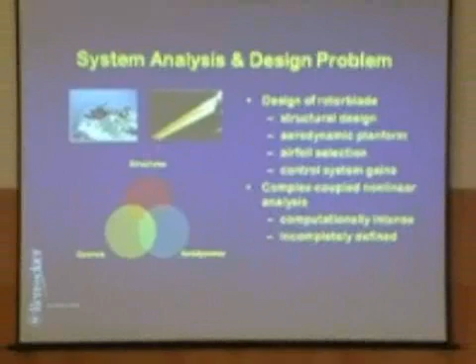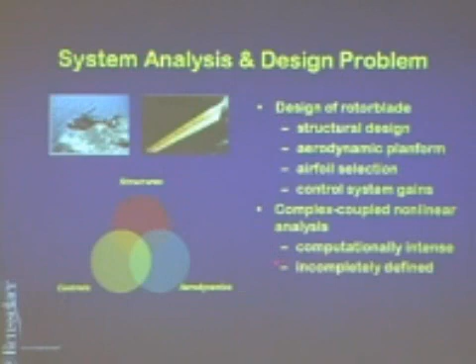We'll start with an example. Here's a helicopter rotor blade. The design of this blade requires interactions between disciplines like structural design, aerodynamics, control systems. You see that I've represented in this cartoon sketch each of these disciplines by these 3 circles, but there is a great deal of overlap or interaction or coupling that exists between these subsystems. The analysis that is involved is computationally intense and in many instances is incompletely defined. You must resort to experiments to get a certain amount of information back that could be used in the design process.

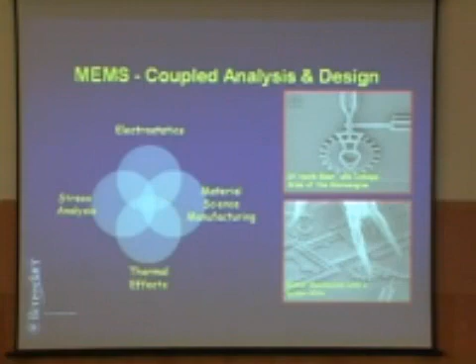Similarly, here's an example of MEMS systems. Here's a 19-tooth gear and linkage arm of a micro engine. Here's a mirror mechanism laid out against a spider mite to show the dimension of this. But in effect, because of these dimensions, disciplines like electrostatics must be considered in addition to material science, manufacturing, stress analysis, and thermal effects in the design of systems like this. Once again, it's a coupled analysis. It is computationally intense. And in many instances, you have to resort to experiments to try and get analytical data in order to perform the design itself.

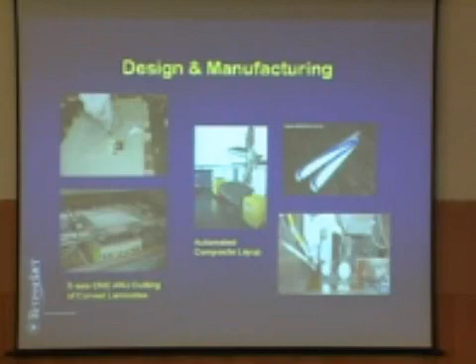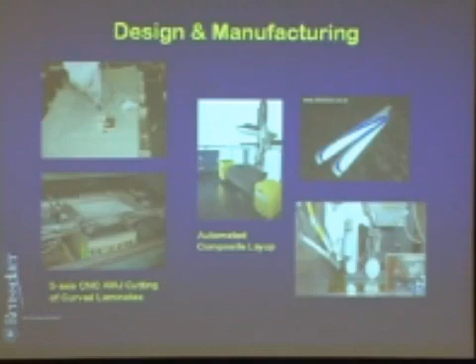A third example, you have to include effects of manufacturing in the design process. So here you see an automated composite layup machine in which you have a robot arm which lays out composite fibers over a mold at specific angles. Here's this curved panel in which you are cutting out certain objects, again by an electronically controlled machine. The issue here is that we would like to migrate the manufacturing process as early in the design process as possible. And in order to do that, you must have models which represent the manufacturing process itself.

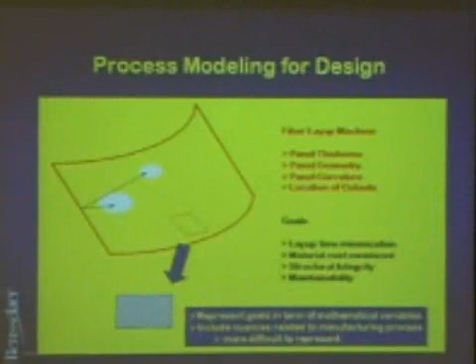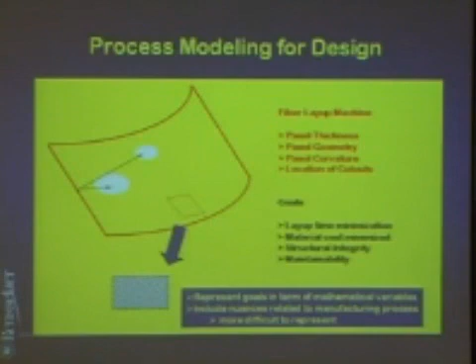Here's a more detailed representation of that. Here's that curved panel. I have put some cutouts here. These cutouts might have to be placed because this panel is covering a cavity which you might have to access for maintenance purposes. So here's your fiber layup machine. It has to control the panel thickness, the geometry of the panel, the curvature, as well as the location of the cutouts. And the goals of designing this might be, you might want to minimize the layup time that is required to build this panel.

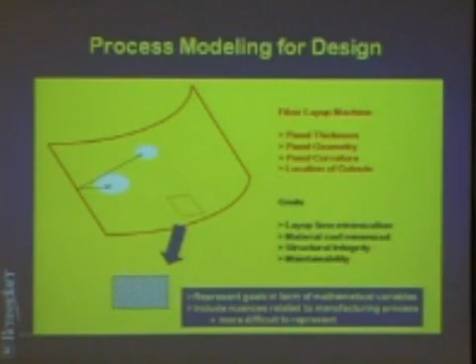You want to certainly minimize the material cost. Of course, you want to guarantee structural integrity of this part, and then place these cutouts in such a place that you can actually maintain this object that you are trying to cover with this panel. So the goal of this is you must be able to represent all of your design goals in terms of certain mathematical variables.

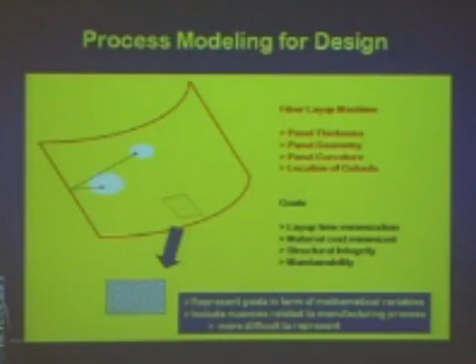As well as be able to include nuances that are related to the manufacturing process. Not all manufacturing processes can be modeled exactly. You sometimes have to go to the shop floor to get feedback from the operators on when a machine functions well, when it fails, and be able to model that into an appropriate mathematical format that can be then used by your standard design algorithms, which might be your classical mathematical programming algorithms or soft computing algorithms that were discussed earlier this afternoon.

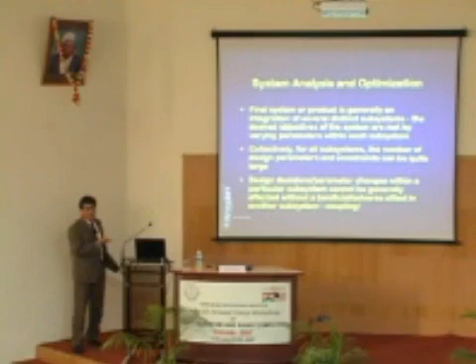So, in summary then, the system analysis and optimization problem that we'll talk about here has these characteristics. The final product or system is generally an integration of several distinct subsystems. There are design parameters and constraints in each one of these subdisciplines, and the overall desired objectives are essentially met by varying the parameters within each subsystem. Collectively, for all of the subsystems, the number of design variables and constraints may be quite large.

And also, you cannot, in most cases, conduct design in isolation because changes in design parameters that take place in one discipline have an adverse or beneficial effect in another subsystem. So you have to take those couplings into account as you go through the design process.

At the heart of all of this is the design optimization problem, which is mathematically stated as follows. All of you who have dealt with optimization have seen the structure. You're minimizing a function which could be a vector quantity or a scalar quantity subject to a set of inequality or equality constraints as well as side constraints on the design variables. These design variables can be a mix of either continuous variables, discrete variables, or integer variables, and you may have a large number of such variables.

Now, pay close attention to the fact that there are discrete and integer variables because soft computing techniques really come to our aid in this particular instance. The design space may be non-convex or disjointed, and I'll just show you a sketch of what I mean by that, and your traditional optimization methods are ill-equipped to handle this kind of a characteristic in the design space. You also have to deal with non-crisp design information, and the speaker this afternoon, Dr. Kumar, talked about fuzzy modeling as a way to get around this, and I'll also have an example to show you where this has been used.

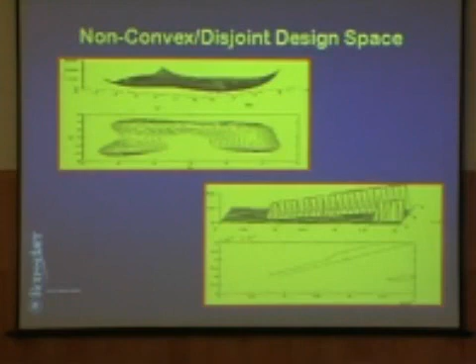This quickly is an illustration of a non-convex space, a classical function with 4 local optima. In this case, each one of these 4 local optima have the same objective function value. Your traditional gradient-based techniques will converge to the nearest local optimum from where you start. Here is an example of a disjointed design space where you have regions of feasibility separated by large regions of infeasibility. So when you get into one of these feasible spaces, it's unlikely that you're going to get out of them using your traditional gradient-based mathematical programming algorithms.

So what are the soft computing adaptations that I will talk about here today? Neural networks and fuzzy logic. Dr. Kumar talked about surrogate modeling of the analysis. That's certainly one application that we have used extensively. Discovering causality in data becomes important as well, because if you have a large optimization problem involving a very large number of variables, you want to perhaps break it down into a sequence of smaller, albeit coupled problems. You would like to find out which variables affect which design constraints so as to make a rational choice for that decomposition. Again, artificial neural networks have been used in that process as well.

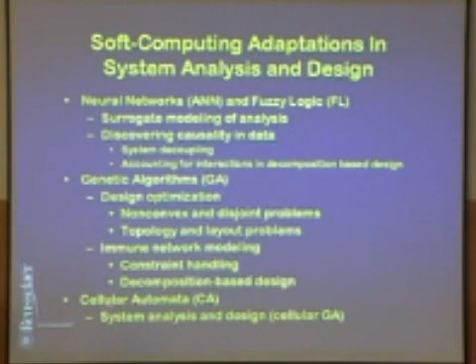Genetic algorithms certainly have been very useful in designing non-convex and disjoint problems, as well as topology and layout type of problems. And when you talk about nano assembly, for example, which are topological problems, genetic algorithms have a significant role in that regard as well. I'll talk a little bit about immune network modeling. This is a variant of genetic search, which I'll show how it has been used in problems of constraint handling, as well as in accounting for the interactions in decomposition-based design. And finally, I'll say a few words about cellular automata and the implications of this particular computational paradigm in both system analysis and design problems.

You have a set of input-output data, and in effect, rather than training the coefficients of those polynomials in a response surface, you are in essence finding out what are the interconnection weights and the characteristics of your neural network, or of your artificial neuron, that give you the best match between the input and output. These are the characteristics. Certainly these can learn to modify behavior in response to the environment, as well as they have the capability of generalizing.

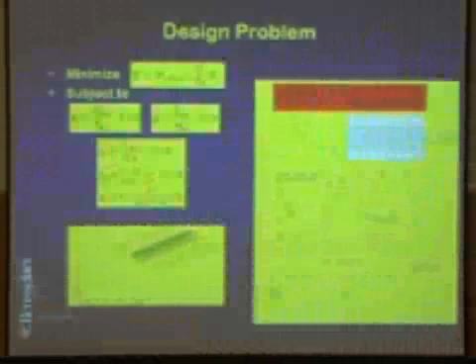Okay, so I'm not going to dwell on that slide, just show you some examples. Here's a design problem in which we have a reinforced composite panel with some stringers.

In case you're wondering why I keep talking about structures and materials, I'm an aerospace engineer by training, and this is what I feel most comfortable about, and hence I'm using these examples.

But we are trying to design this panel, essentially getting things like the height of this reinforcing stringer, the crown width, the width at the base. This is built out of composite materials, so you have the thickness to control as well as the layup angles of these composite plies that you're building.

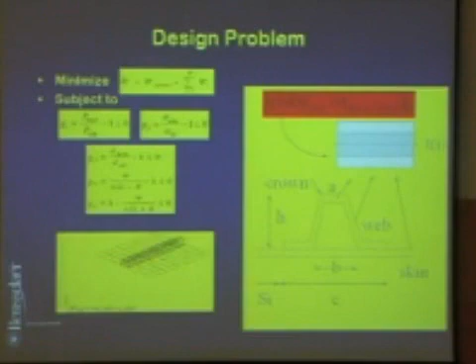Here's your objective function. It is subject to a number of constraints, and in essence I just wanted to show you that while you have a mix of discrete, continuous and integer variables, you can still use this type of problem in a backpropagation neural network to actually come up with things like predicting natural frequency, buckling load, the maximum deflection, maximum von Mises stress. And you can see that the maximum error that you pick up is maybe of the order of 6%. Most of them are 1 to 2%.

So if you build an approximation using a neural network, it can be very effectively adapted and used in multidisciplinary design types of problems. It's essentially a free computation once you have a network trained.

The computation is free, and when you're using it in conjunction, for example, with an evolutionary algorithm which requires a lot of calculations, this surrogate model is a cheap one and highly advantageous to use in those kinds of applications.

Let's say a few words about discovering causality from trained backpropagation networks. If you were to simply take the weights of the trained network and multiply them in this sequence, that is the weights between the input layer and the first layer, between the first and the second layer, and so on till you get to the output, in essence what you get is something called a transition matrix.

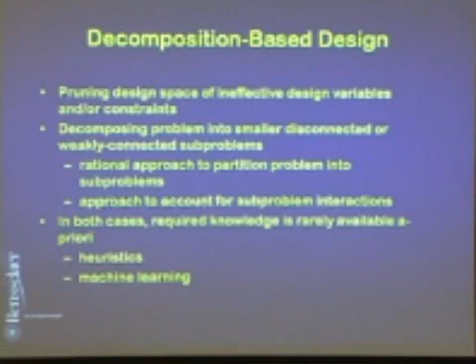People have resorted to things like heuristics to do this. Machine learning has also been put to test in these kinds of problems. But let's just illustrate this with another example. This is the same rotor blade that we talked about. Various design variables defining the plan form of this blade, as well as the internal dimensions of the cross-section of the blade, which look like an airfoil. Again, you see that it's a mix of continuous, integer, and discrete variables. Fairly large dimensionality problem.

It's rather interesting to note that this blade actually has tuning masses, which are masses that are placed along the rotor blade, which take care of the vibrations in the blade, right? How much to place and where to place them are design variables in this problem.

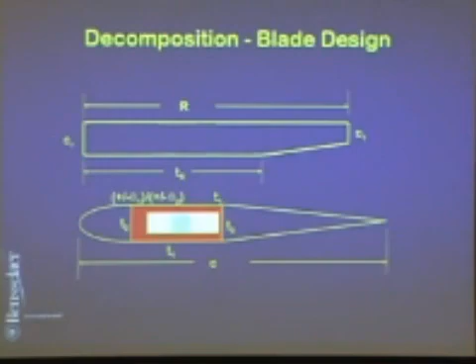But it's interesting to see that in subsystem A, masses M1, M2, M3, which are three masses closer to the root, fall into subsystem A. Subsystem B does not contain any of those masses, and M4 and M5 actually go into subsystem C.

So in a typical industry type of design environment where people are constantly fighting about control of design parameters, this kind of an approach gives you some leeway as to how to partition the design space and say, you folks essentially control these variables. The variables that belong to another subsystem actually impact their design problem far more importantly, therefore it should go there.

Quickly turning our attention to the next paradigm, fuzzy logic based modeling. Again, Dr. Kumar spoke of this earlier, but what we mean by this is that for a typical designer, it is sometimes important to keep that fuzzy information in the design problem. When you convert it into a crisp form, you sometimes lose the original intent of the problem statement. Stating it in this fuzzy form allows a smooth transition between the two bounds.

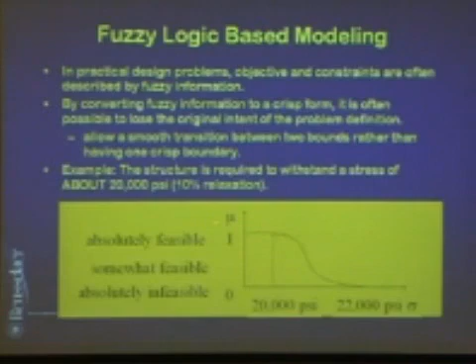So for example, here, if you're saying that the structure is required to withstand a stress of about 20,000 psi, and you admit a 10% relaxation in this, then the membership function might look something like that, right? Here is the fuzzy logic membership function for height. Again, this is something that Dr. Kumar alluded to earlier in his presentation, so I shouldn't have to spend time here.

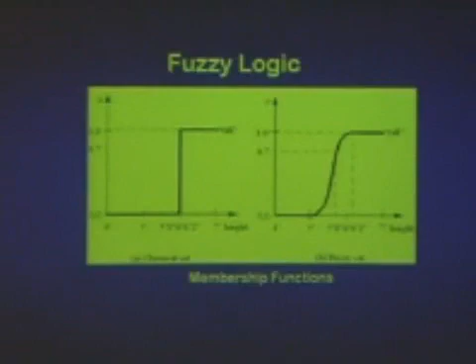Important thing here again is that fuzzy logic rules use essentially conditional statements. These are if-then rules. For example, the fuzzy if-then rule could assume the form that if x is A, then y is B, where A and B are both linguistic variables. Where this has been used, here's a quick example.

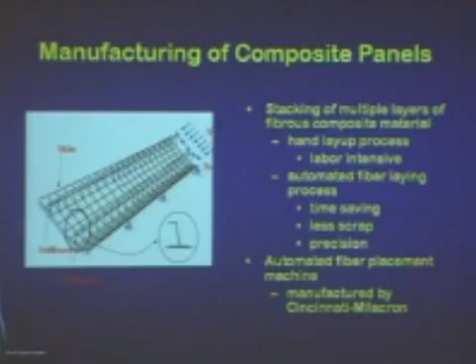Manufacturing of composite panels: this could be laid up by hand, which is a labor-intensive process, or you could resort to an automated fiber laying process. You can get time-saving, less scrap, as well as precision if you were to use this machine. And there's a machine manufactured by Cincinnati Milacron, which is called an automated fiber placement machine. You essentially build a mold of a part, and then the machine can traverse at various angles, at various speeds. It can compact the fiber as it lays it down. All of those wonderful things it can do.

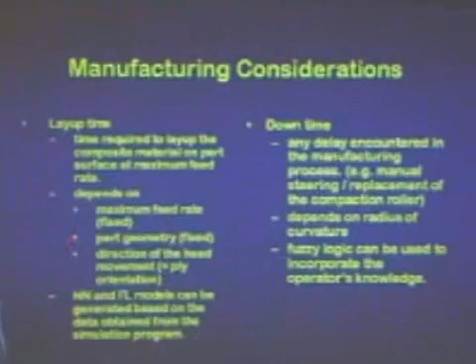But in theory, while that works fine, if you go to the manufacturing floor and talk to the people who use that part, they will tell you that there are some problems with it. So the layup time that we are talking about here depends on the maximum feed rate. How quickly can this part move back and forth? It depends on the part geometry, as well as the direction of the head movement.

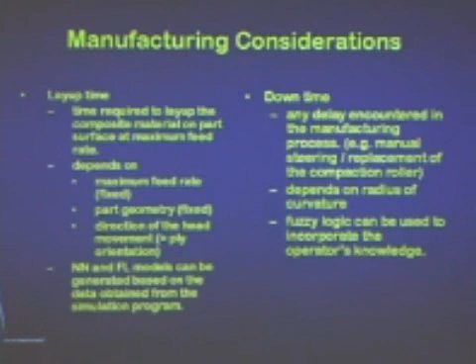So all of these design parameters also affect the structural integrity of the part, because the fiber angle will tell you how stiff the panel is, right? The thickness will tell you how stiff the panel is. The curvature of the panel tells you how functional that panel is. All of those are in fact also dependent upon the manufacturing considerations, because the layup time that you're talking about may or may not be optimized depending on that. So you would like to include those manufacturing considerations in the design process.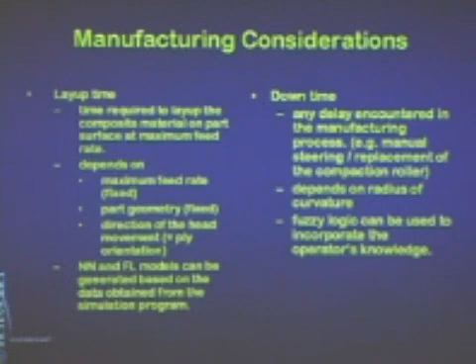Any delay that is encountered in the manufacturing process we refer to as a downtime. For example, the operator has to stop the machine and then manually steer it in a particular direction, or has to replace a compaction roller. If the radius of curvature of the panel is too small, then you have to put in a smaller roller, otherwise the fibers will form a bridge between the two sides. So all of these things require careful monitoring in the design process.

You could use fuzzy logic in effect to incorporate the operator's knowledge. So this we did as a DARPA funded project with Boeing. We went in and talked to the operators who were using this machine. They told us that, well, for radius of curvature typically less than 60 inches, the machine has to be slowed down and manually steered.

Okay, so here's one piece of nugget. The speed of the machine needs to be reduced as the radius of curvature decreases, because otherwise you get longer downtimes. For radius of curvature close to 5 inches or less, the roller should be replaced with a lower bandwidth roller. Again, you see that there is fuzzy information being transmitted. Minimum allowable radius of curvature is about 1 inch. Again, fuzzy information. And the corresponding downtime is approximately 1 hour.

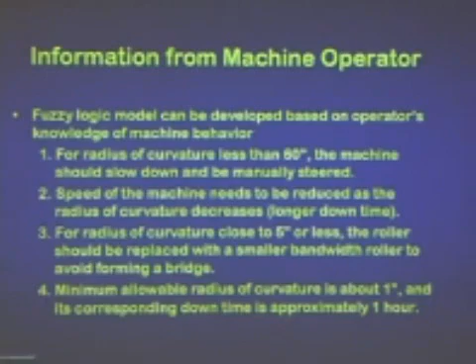So you get all of this information feedback from the operator, and you essentially could then go ahead and say that, all right, I'm just going to create 3 sets of rules. If the radius is small, then the downtime is long. If radius is medium, then downtime is average. If radius is large, then downtime is short, based on all of those rules. And here are the input-output membership functions. Here is the kind of a model that we produce, that the downtime based on the radius of curvature is represented by that simple chart.

Now, once we have that model, this could be brought back into the design process and be part of the mathematical optimization or genetic algorithm or any other algorithm that you want to use to solve that optimization problem. But you now have a mathematical representation of the problem that you could use as part of the design.

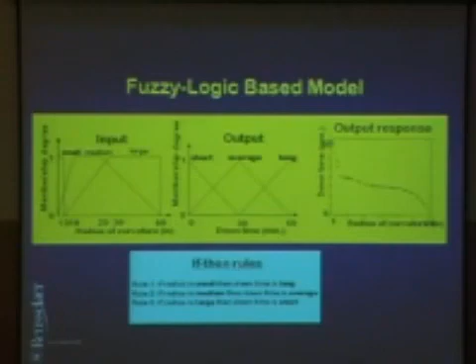So this brings me then to the subject of genetic algorithms and evolutionary strategies. These are certainly algorithms that are patterned after natural evolution. They are population based. That's the critical thing to remember. There are some advantages to having a population based search. There are also disadvantages. You essentially start out by taking your designs and mapping them into string-like structures, and then apply typical evolutionary operators such as crossover, mutation, selection, and so on that you encounter in biological principles of evolution.

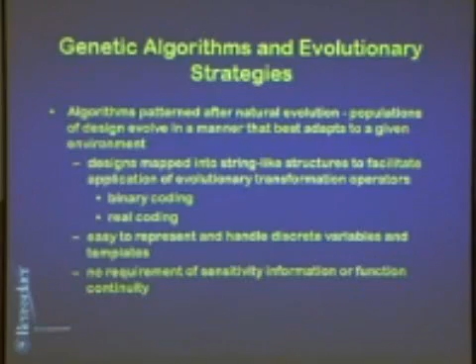It's very easy to represent and handle discrete variables and templates in this type of design algorithm-based approach. There is no requirement of sensitivity information or function continuity. So 2 things that I spoke about earlier: disjoint design space and computational cost. Getting function information is one thing, getting the gradients of those functions is even a harder level problem. So if you can avoid getting gradients and have an optimizer that helps you get to the solution, that is a plus in your favor.

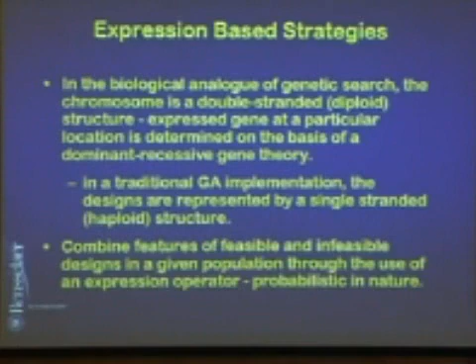In a traditional GA-based search, the designs are represented by a single-stranded structure. Remember, we just have a single strand of 1s and 0s, so that's the haploid structure. So could we borrow from this principle and say, let's combine the features of feasible and infeasible designs in a given population through the use of an expression operator, which is probabilistic in nature. The idea here is that, let's say here's a string A which is feasible, string B which is infeasible.

You temporarily assemble a diploid model, then you carry out an expression operator on a bit-by-bit basis to determine what gene is expressed at a particular point along this string length. And this is done with the probability of expression p sub e. So you reduce this down to a single parameter p sub e. This has been successfully implemented in genetic search, and is shown to be a much more robust way of handling design constraints than the penalty function approach.

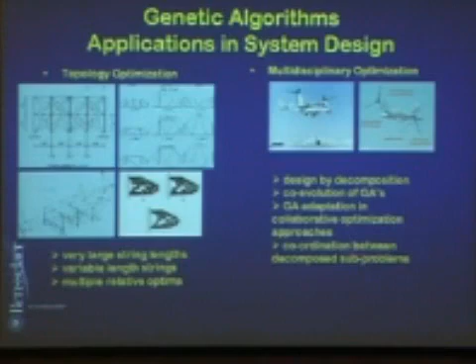Design of a tilt rotor, which I have shown on the right hand side. This is a multidisciplinary design problem. Structures, aerodynamics, controls, propulsion systems, all of them interact in this design. And some characteristics of this would be designed by decomposition, which requires that you actually have co-evolution of genetic algorithms. I'll say a few more words about that. And then the ability to coordinate what goes on between different subsystems.

I'll say a few words about enhancements in GA-based search. A number of adaptive strategies have been proposed for associating significance with bit locations on a string. So if you have very, very long strings, should you use all of those strings as part of the crossover and mutation operation, or can you identify some criticality to certain portions of the string and only work on those? That's the directed crossover and multi-stage search. This also brings me to the subject of immune network modeling. That's a way of actually improving the convergence characteristics of these algorithms.

In decomposition-based design, you partition the problem into a number of loosely connected subproblems. You solve these subproblems in parallel, and what that results in is a reduced dimensionality, so you have shorter string lengths. But then you have to coordinate the solution between the subproblems because they are in fact still coupled, although weakly.

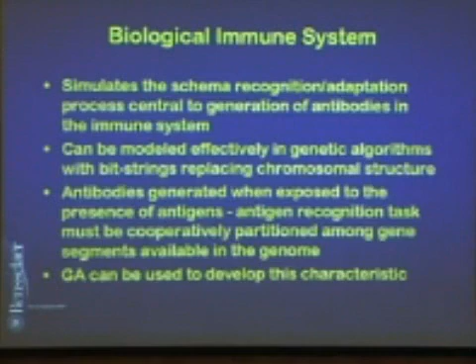Okay, so this now brings me to the topic of biological immune system. What this is, it actually simulates the schema recognition and adaptation process which is central in biological immune systems. What is it that generates antibodies in our immune system when it's attacked by an antigen, for example? It has been shown that this can be modeled very effectively in genetic algorithms with essentially your bit strings replacing the chromosomal structure. The antibodies are generated when exposed to the presence of antigens, and this task has been modeled in GA. Let me show you how it would be done.

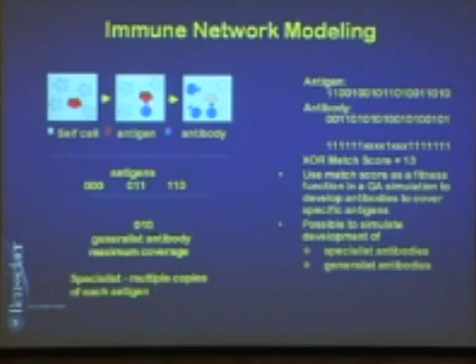Let's say that there are a number of cells in a biological system. The blue line indicates that these are self cells. Here's an invader marked in red. This has to be then tackled or recognized by an antibody, which then attaches itself to that antigen and eventually purges it. So in biological systems, it's a complex protein shape recognition problem. Here, it is a matching of strings, aligning of strings. So you have ones and zeros. Can you actually create a GA-based evolution that does that?

So here are the antigens. There are 3 different antigens that I've modeled using zeros and ones. I call this a generalist antibody. Why is it a generalist? Because it provides maximum coverage to each one of these 3 antigens. You see that this is different from each one of these 3 by exactly 1 digit. So this is the best match that you can get. This is different from 0, 0, 0 because there's a 1 in the middle, 0, 1, 1 because there's a 0 at the end, and 1, 1, 0 because there's a 0 at this end. So this provides the best coverage of this particular antigen.

You could also get a specialist antibody. The specialist antibody would be either a complete match of this antigen, or it could be a complement of that antigen. So 1, 1, 1, 1, 0, 0, 0, 0, 1 could be a complement of that. Now, how does this play in genetic algorithms?

Well, if here's a long antigen and here's an antibody, and let's say I calculate the XOR match score for this, the points at which it's a complement, 1, 0, 1, 0, etc., I've labeled as ones, and you can see that that match score is 13. If I use that as a fitness measure in your traditional genetic algorithms, then in fact you produce a whole bunch of antibodies which are complements of the antigen that you introduce in the population. So you can use the match score therefore as a fitness function, and it is possible to generate both specialist as well as generalist antibodies.

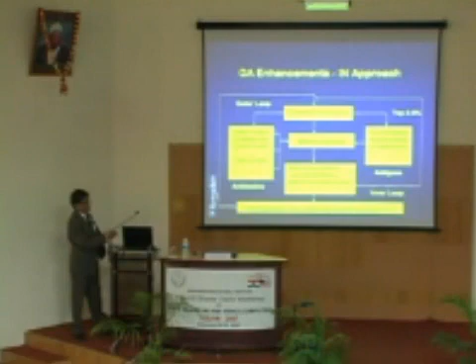You come in, you have certain objective and constraint functions designed, you have your population of designs, which I'm just going to label as antibodies. I select the top 3 to 5% of this antibody pool as antigens, and then using the generalist antibody match function approach, I match each one of these antibodies. I actually randomly select antibodies from this pool using this match function. I then determine the highest scored antibody, add to its match score, and go back and repeat this several times.

So while it speeds the convergence process, I want to put in a word of caution here, the word of caution being that if you implement speed of convergence, you are going to lose on an opportunity to try and get to the global optimum. So there's that trade-off that you might actually miss getting to the global optimum because you have sped up the process fairly early in the design strategy.

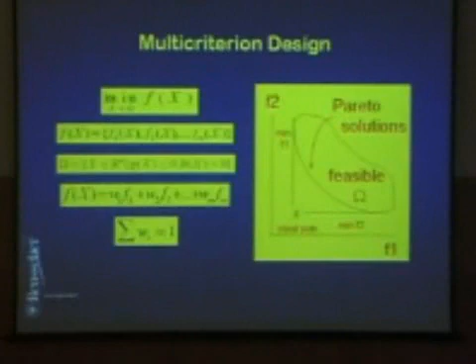The line that separates the feasible domain from the infeasible domain is the Pareto frontier, and on that Pareto frontier all of your designs are in fact feasible, and you can see the trade-off that if I were to improve on f1, then I lose in f2 in a certain way. So that's the whole concept of the Pareto frontier, and designers would love to actually generate the Pareto frontier vis-a-vis generating a single optimal point, because it really gives the designer the ability to decide for themselves how they want to trade off designs in the whole process.

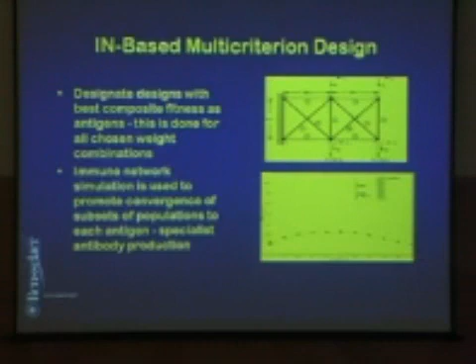So in the immune network based approach, you simply designate designs with the best composite fitness as an antigen. This is done for all of the chosen weight combinations, and then you use the immune network simulation to promote convergence of subsets of population around each one of these different weight combinations. This gives you a very nice Pareto frontier that you are able to actually capture. In conjunction with fuzzy modeling, you can also capture non-convex Pareto fronts. This is a weakness for those of you who are involved in design optimization. You recognize this problem immediately, that if you have a non-convex Pareto front, your weighted sum method

That's not a problem. I think you need a battery for me as well. I'm running out of charge myself, but we'll work through this.

So in conjunction with fuzzy modeling, you can actually use this immune network approach to generate non-convex Pareto frontiers. Using just the simple weighted sum method, you would get points that lie on the convex part here. You might pick up the point here, but you will miss this entire Pareto frontier. So this is something that a combination of fuzzy immune modeling has been able to overcome.

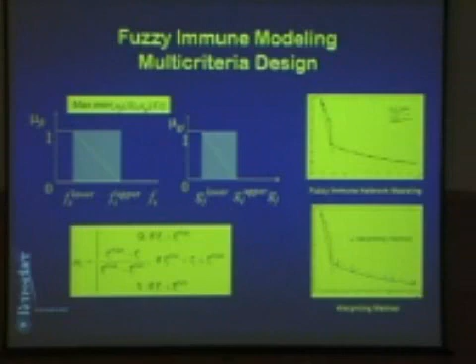Okay, here's that same design problem that we were looking at earlier, the helicopter rotor blade, 3 subsystems. Now, the important thing to consider here is that when you are doing design in one particular subsystem, you really need the results of analysis from another subsystem as well. Because analysis in another subsystem actually does contribute to what's going on in your particular subsystem.

So you could use a counter-propagation neural network and use only those subsets of variables that are germane to a particular subproblem, with representations of other variables left out, and still be able to construct an approximation to the output, and use that approximation to do design in each of the decoupled subsystems. So that's the very simple idea of using counter-propagation networks with pattern completion capability to actually do decomposition-based design.

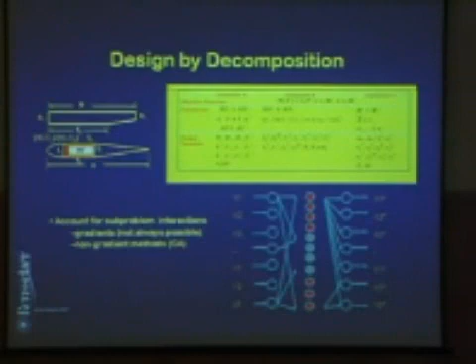You can also do coordination through immune network modeling. You could actually have two subproblems, subproblem A and subproblem B. You do evolution in each one of these. You select the best designs in each of these subproblems, label them as antigens, and now you do an immune network simulation to generate generalists.

So in fact, what you're doing is you're averaging what goes on in each one of those subsystems. Use those updated strings to actually continue this process till you get convergence to the desired design. So this allows the process to actually converge as opposed to diverging, where the 2 subproblems may be going off in different directions altogether.

I want to say a few words about parallel GA implementation. Coarse grain versus fine grain parallelism. You are essentially dividing the population into a number of subsets. You assign a subset of population to a given processor. You can simultaneously evaluate both the objective function and constraints on that subprocessor. So in effect, what you are doing is simultaneous evaluation of the objective function and constraints on different subprocessors. You bring that information back onto a central processor to do your GA operations, and then split again.

So in this kind of an approach, you can get a near linear scaling with the number of processors. The GA operations will still be performed on a single processor. Fine grain parallelism, it was already alluded to this afternoon, is where the population is divided into a number of sectors and mating is restricted to within each sector. There is minimal migration allowed between sectors, and there may also be a small overlap between the sectors so that you can get strings from one subsector actually going into the other one.

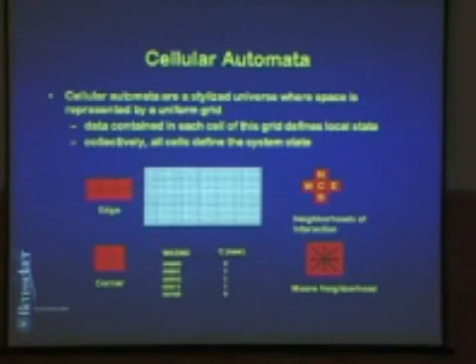Let me next talk about a paradigm referred to as cellular automata. Cellular automata is a stylized universe where space is represented by a uniform grid. So here's a flat plate. I've broken it up into a number of discrete cells. Each cell will contain information about the state of that cell. If you are thinking about just a binary state, the cell could be either a 1 or a 0. You could have a random set of 1s and 0s in each of these grid points.

And let's say that you came up with a certain set of rules. The rules say that if all of the west, south, east, and north are 0s, and the center is 0 as well, then the new value of the center is 0. And similarly, all of the other rules. Now, given some arbitrary state that you start off with, if you applied these rules, you would get to a converged new set of state variables for each of these discrete cells. Here is a very commonly used neighborhood, which is referred to as a Moore neighborhood, where there are 8 neighbors that are involved in the process.

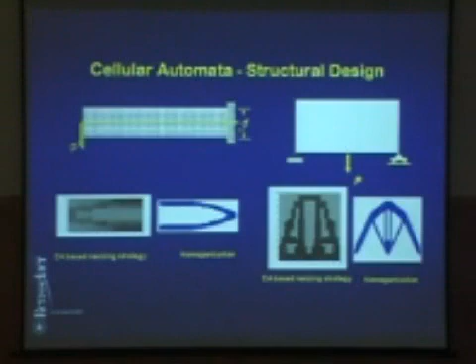Likewise, here's a plate, and you want to carve out the least weight grid that can carry this central load. Results of homogenization shown here, results of a CA-based resizing strategy shown on the adjoining chart. So it has been used in this context as well.

This same paradigm can actually become a model for fine-grained parallelism in genetic algorithms. You have a population of candidate designs that are distributed over a spatial grid. Your connected graph is an example of this. The whole concept behind this is that you only invoke the stochastic transformation operators between selected neighbors. So you don't go outside of that.

You could shuffle position of candidate designs as an option. A massively parallel implementation is possible. In fact, you could go to as many processors as your population size. This has been applied in problems of multi-criteria design optimization as well as simultaneous analysis and design of structures.

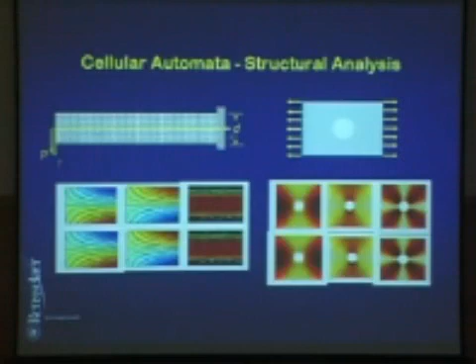So in addition to your GA-based, you could also use the variables corresponding to the analysis as design variables, and these could become additional state variables at the site, in which case when you evolve the state vector, you're simultaneously solving the analysis and the design problem together. So for those of you who are familiar with optimization algorithms, this is the paradigm that is referred to as SAND, S-A-N-D, or simultaneous analysis and design approaches.

Let me close this presentation now by simply stating the obvious, that soft computing algorithms provide remarkable flexibility in the analysis and design of engineering systems. Applications have ranged from optimization to real-time control as well as system modeling approximations. Really the research frontiers in this area are at the interface of algorithm implementation in hardware. I believe that's the next big step that we are going to go through, as well as other physical and natural systems, including biological systems, in fact.